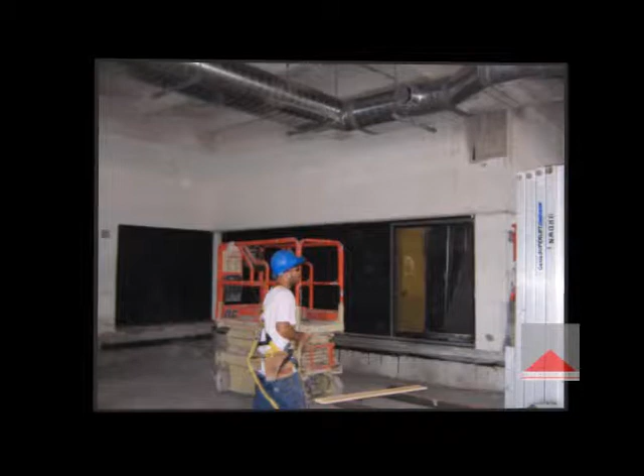If they get approved and they make all the corrections with all the notes, then the state will provide the final inspection at 100% when all the equipment, everything is up and running. Everything has to work correctly, especially in emergencies. This whole concept of a hospital design or a healthcare design is based on defending in place, which means a patient that is under narcosis is not conscious, cannot defend himself. They cannot organize exiting out of the building if there is a fire or smoke.

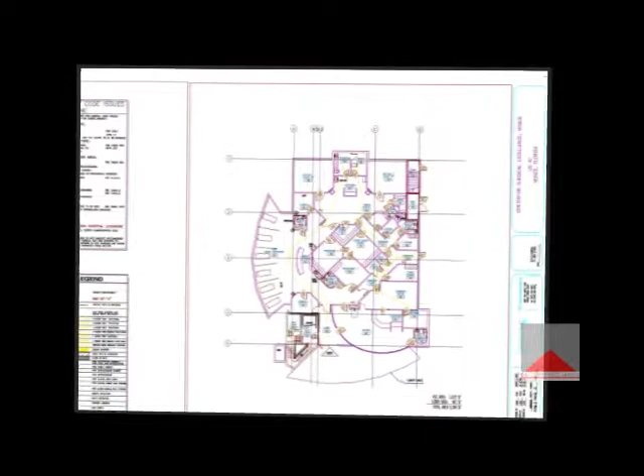And so these things are all very much regulated in the sense that smoke is probably the largest killer or hazard in a hospital. It travels very fast. It finds any little opening anywhere and will continue traveling as fast as it can. Therefore, the design of a building, which is done by a highly specialized architect and engineers that are electrical, mechanical, plumbing, fire protection, they will design the buildings to make these defense systems work. To do this, the concept of defend in place in a hospital is achieved by compartmentalizing the building.

Think of it as a ship. A ship has compartments. If it springs a leak, they shut the compartments and the leak is contained in a certain location. It's the same concept with a hospital or a nursing home. If there is a fire or smoke or any kind of major emergency, they will isolate that area and they can move the patients out horizontally but not vertically. You cannot carry patients down the staircase in beds and attached to IVs or any kind of other equipment. Therefore, these facilities have to be very conscious of how these things are designed.

To assist the architect, the American Institute of Architects has developed guidelines for design and construction of hospitals and healthcare facilities. Since 1947, the American Institute of Architects guidelines have set a minimum standard for American healthcare facility design. Today, these performance-oriented design requirements give healthcare providers and design professionals guidance on good practice and emerging trends. JCAHO, many federal agencies and authorities in 42 states use the guidelines, either as a code or a reference standard when reviewing, approving, and financing plans, surveying, licensing, certifying, or accrediting complete facilities, or developing their own codes.

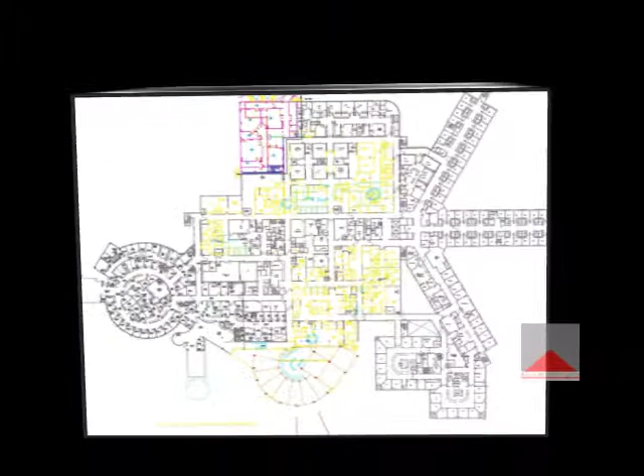The AIA Guidelines for Design and Construction of Hospitals and Healthcare Facilities reorganizes and renumbers content according to facility types, standardizes language, uses information categories, and introduces color to help users quickly find the information they need. Responding to public input, the Multidisciplinary Health Guidelines Revision Committee of the Facility Guidelines Institute made significant content updates. Part 1, general, applicable to all healthcare facilities: expansion of the environment of care chapter, including detailed functional program requirements and an appendix on green design, new materials, and infection control risk assessment, ICRA, and infection control risk mitigation recommendations; a chapter on the common requirements for all healthcare facility types.

Part 2, hospitals. Single bedrooms as the minimum standard for typical nursing units in general hospitals. Revised bed clearances and new bedside documentation areas in critical care units. New sections on intermediate care units in general hospitals, observation units, emergency departments, freestanding emergency facilities, and in-hospital skilled nursing units. Revised text for decontamination areas and appendix language on surge capacity in emergency departments. Revised section on in-hospital psychiatric nursing units. New chapters on small inpatient primary care hospitals.

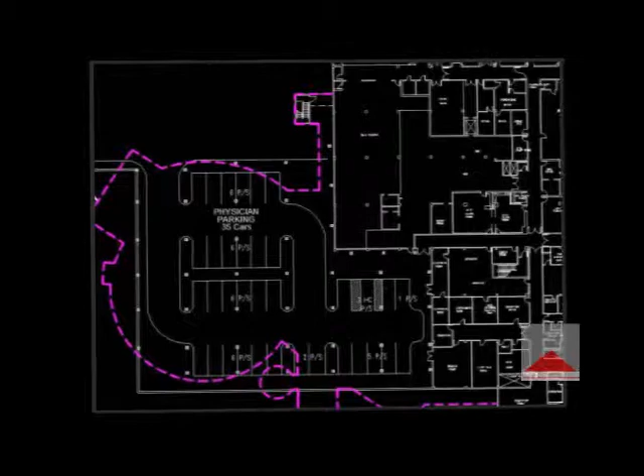Ambulatory care facilities. A chapter of common elements for outpatient facilities. Revised chapters on freestanding surgical facilities, birthing centers, and primary care outpatient facilities. New chapters on urgent care facilities, office surgical facilities, gastrointestinal endoscopy facilities, renal dialysis centers, and psychiatric outpatient centers. Other healthcare facilities.

The following pictures and slides you will see are my work on many hospitals and healthcare facilities over the past 25 years in Florida. These all show the different designs, the different approaches, the different solutions to situations that were specific to the healthcare facility. It is somewhat difficult to explain every detail of these slides on this video. As you can see, we are very conscious of what we call buildings that are designed to cure, and that means that patients feel very comfortable, relaxed, and can feel at home rather than being in an institution. This is very important for the patient as well as the families.

Circulation is of very high importance to us. You want to make sure that you don't have either the staff or the patients travel forever to get to their destination. And again, therefore, there are several solutions here that we've come up with that we feel have achieved and accomplished these goals.